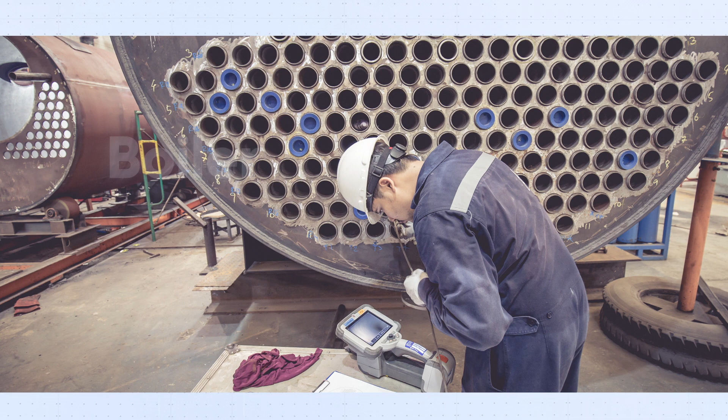ChemAqua has spent decades in developing and improving products for boiler water treatment. Our newest innovation, the Boiler Deposit Index program, will ensure our customers have a cleaner boiler. So, what is the Boiler Deposit Index program, or BDI?

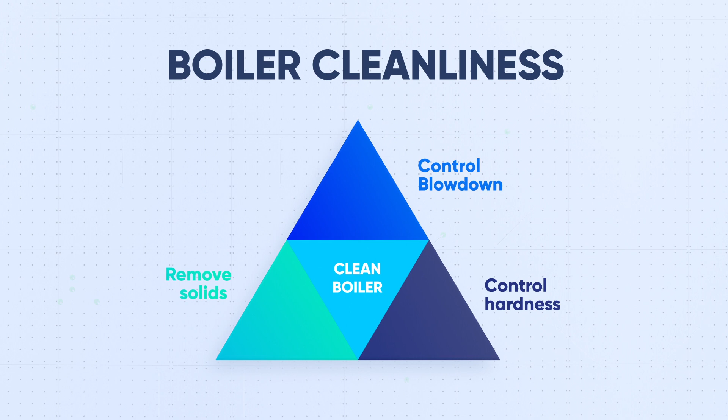For many years, the approach to boiler cleanliness was controlling blowdown, removing solids out of the boiler, and controlling hardness, which was the main factor in hard scales in the boiler. And if we could control those two factors and add phosphate and sludge conditioner to turn scale into soft sludge that can easily be removed, that was the philosophy for many years.

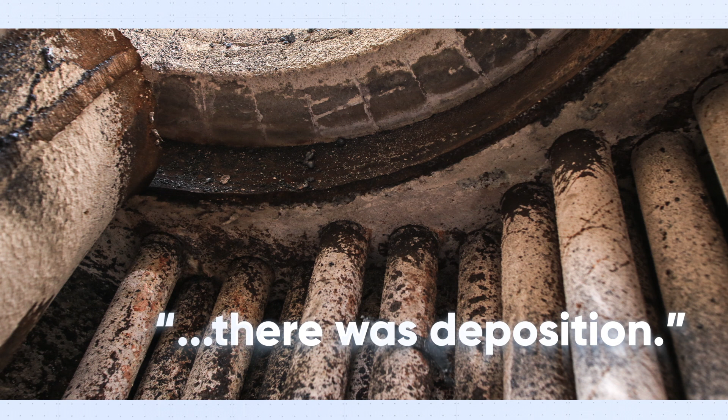But here's the interesting thing. When we ask most companies that have middle pressure boilers to be very honest about how it looked when they opened it, they would tell us there was deposition. It would be rare that there was a completely clean boiler, and it didn't make sense.

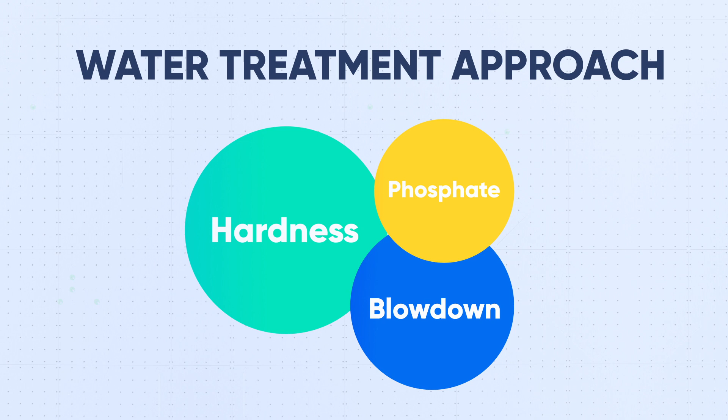So what water treatment companies typically did was focus on better control of hardness, better control of blowdown, and better control of phosphate levels. After a year, they opened the boiler and it still didn't look as good as they were expecting. We know why.

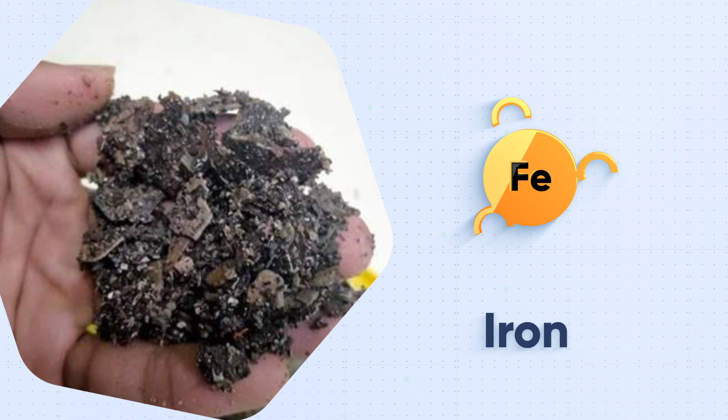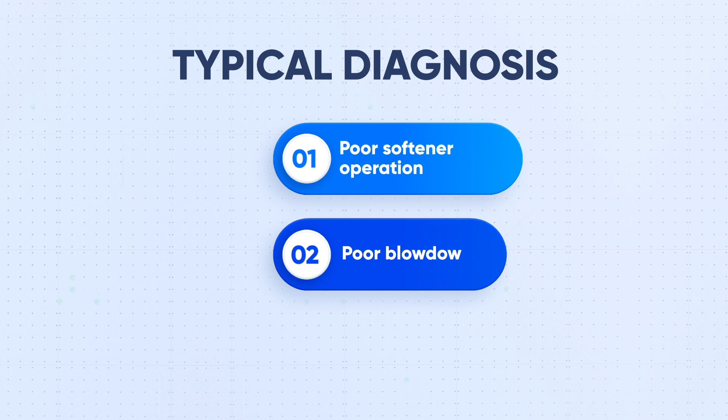In our intensive research, we found that in the middle pressure boilers, an important part of the boiler deposit that came out in analysis was iron. And it was always thought that this iron was just a complex of phosphate, and that phosphate was the biggest part of the scale or deposit along with some hardness. And the usual diagnosis was poor softener operation, or poor blowdown, or poor chemical feed, or a combination of all. The iron in the boiler deposit was largely overlooked.

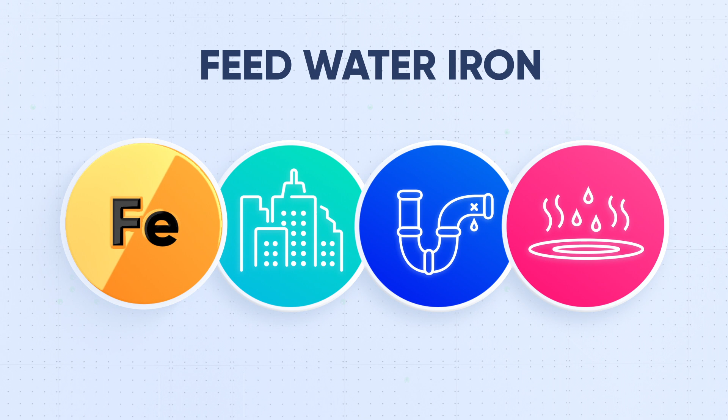But here's what our research has shown. Iron can poison the polymer in a boiler water treatment program. So, think about the iron that comes from feed water, either from city water, or from the corrosion of piping, or iron coming back from condensate. That iron ties up or poisons the boiler polymer. And that polymer is there to condition the sludge so it doesn't stick to the tubes.

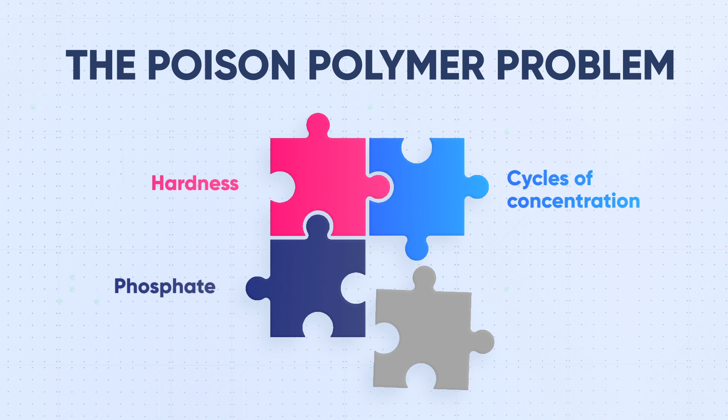So now with the iron poisoning the polymer, even if you had the right hardness, the right cycles of concentration, and the right phosphate, the boiler still didn't open up clean. It all goes back to the poisoned polymer.

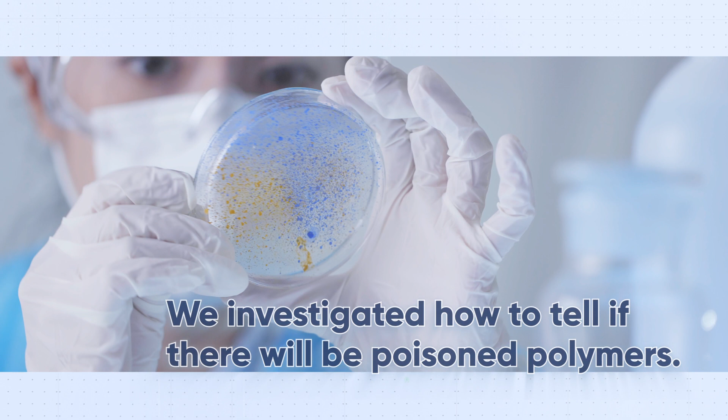So, we began to look at how we can tell whether or not we're going to suffer from a poisoned polymer situation. Through Chem-Aqua R&D, we created a Poison Polymer Index, or BDI, Boiler Deposit Index. It tells us, based on the data we put into the program, whether the boiler when opened should be clean or not.

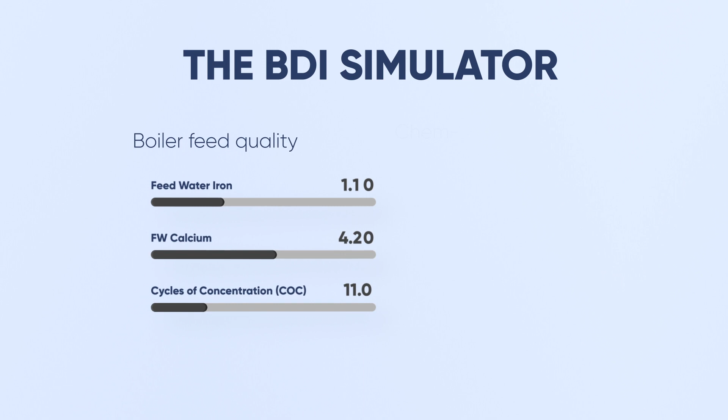So if you look at the BDI program, you can see we can put in different levels of feed water iron, FW calcium, and cycles of concentration, which is the blowdown. On the right-hand side, the bar graphs tell us if the boiler will be clean or not. If the bar graph is blue, it indicates the boiler should be clean, based on the data you have entered.

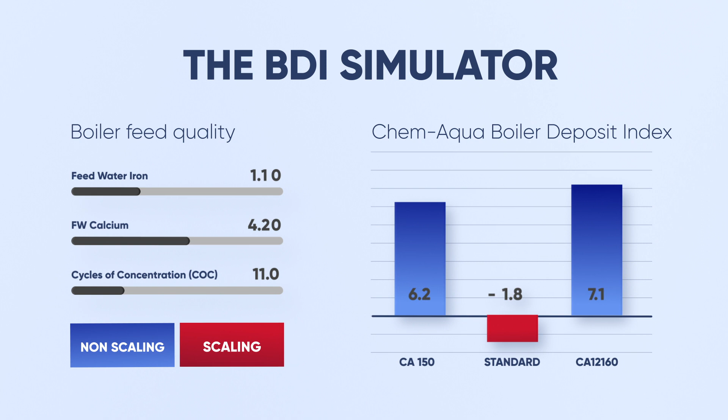There is enough polymer to overcome the polymer poisoning, and you will end up with a clean boiler. If the bar graph is red, we know there is polymer poisoning, and we will probably have a dirty boiler.

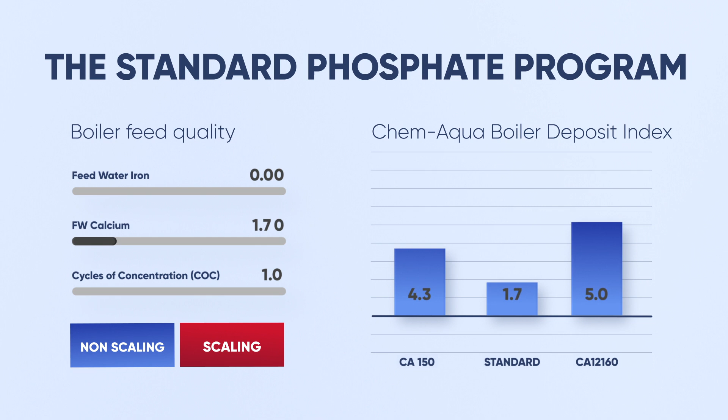Let's take this index and look at what the standard phosphate program would look like, something that has been around for a long time and 90% of companies still use. Let us see what happens as we move the slide and increase the calcium in the feed water. We see a change in the boiler deposit index. So at some point, there's so much hardness in the feed water that the amount of sludge in the boiler can't be removed through blowdown, and we will end up with deposition in the tubes.

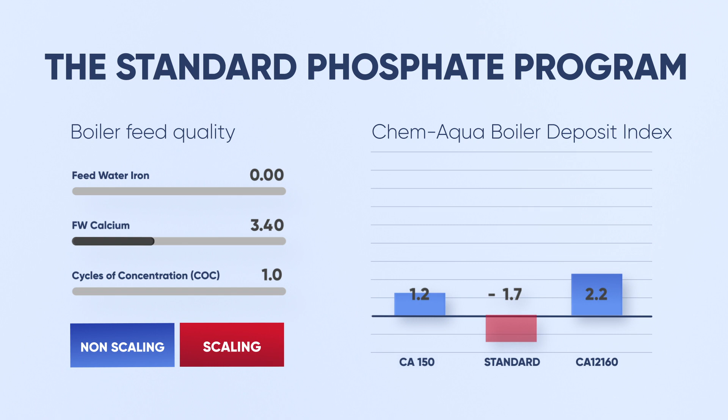Let's look at what happens when you increase the cycles of concentration. The higher the COC, the less the blowdown. The more the sludge stays in the boiler, the better the chance of deposition. So watch what happens when we move the COC from 10 to 20 to 30. You can see how the bar graph changes and predicts whether or not the boiler will be clean.

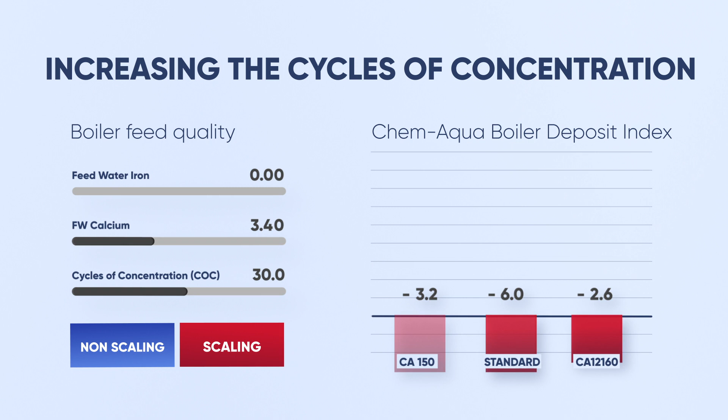But here's the real issue. Let's look at half a ppm of FW hardness and maybe 20 COC, that's 5% blowdown. Look at what happens as we move the small amount of iron upward. We get to a point very quickly when standard programs fail.

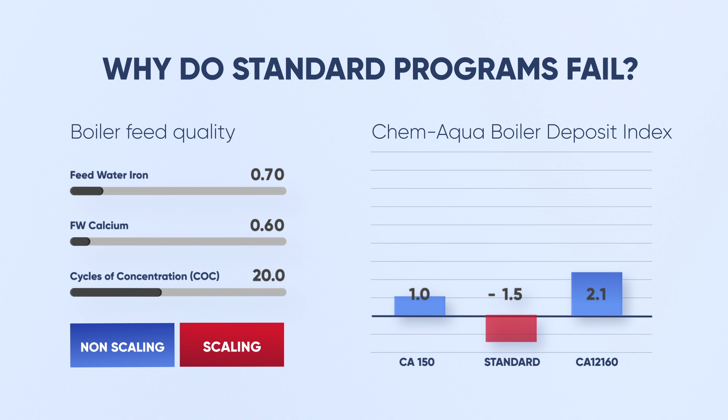There is still enough phosphate. Blowdown is okay. Calcium levels not too bad. But why did they fail? Because the feed water iron has poisoned the polymer.

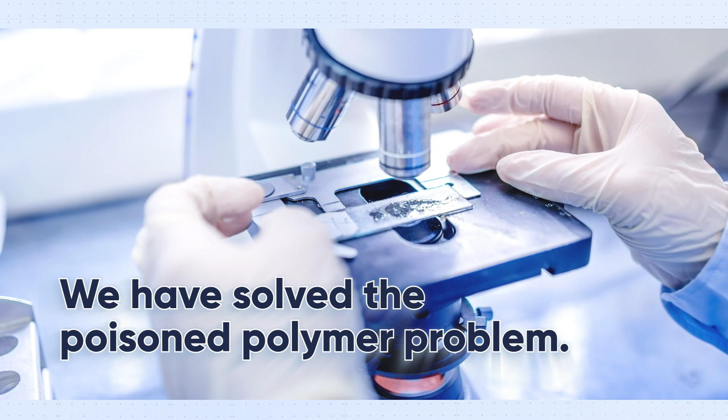Because of this research and development through BDI, we have innovated this product that has a particular chemical in it. It is more aggressive to the feed water iron than the iron is to the polymer. What this means is, this chemical is going to tie up the FW iron so it can't poison the polymer. So the polymer will be available to keep the boiler sludge from sticking to the tubes.

So look at CA12160, which is the newest innovation. You can see that as we move the feed water iron up, CA12160 can handle a lot more feed water iron than standard programs. And that is because of the chemical that we've added to the special boiler product.

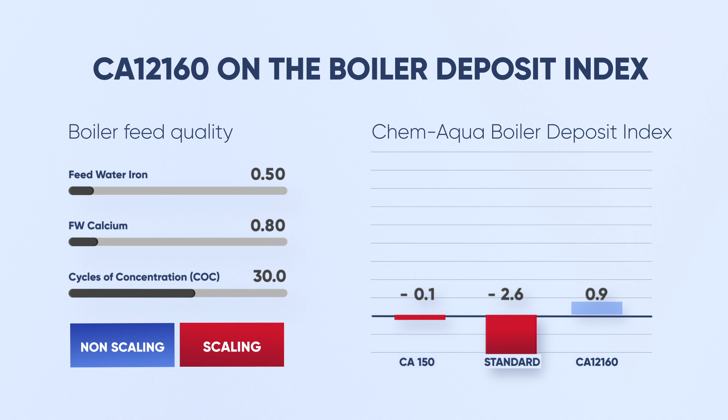And with this R&D knowledge and BDI simulator, we can predict with very good accuracy whether or not your boiler is going to be clean. And we know that switching to CA12160 can make a huge difference in the cleanliness of the boiler.